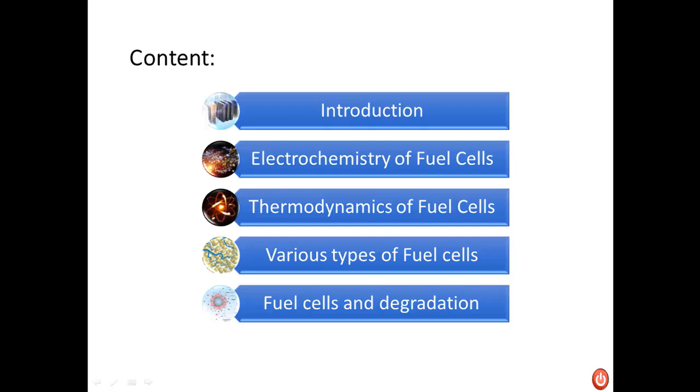The device which does this task is called a fuel cell. The agenda for this presentation will follow some introductory material about the fuel cell, then we'll go through the thermodynamics and electrochemistry of fuel cells and various types of fuel cells. I don't know whether I have sufficient time to cover all of these factors, so I will split this session into 2 or 3 sessions so students can follow. So, introduction to fuel cell - the most important thing is to know what a fuel cell is.

Like an engine, a fuel cell is a device where hydrogen as a fuel enters the device, and oxygen from the other side enters this black box - we could consider it as the fuel cell - and it produces electricity for us, and the byproducts are water vapor and some heat. A fuel cell is a device which converts chemical energy of fuels directly to electricity via several electrochemical reactions. The first fuel cell was built in 1839 by Sir William Robert.

These are two applicable hydrogen fuel cells. One is taken from inside the hydrogen fuel cell car, Toyota Mirai - we will get back to that in the next slides. This other one is another type of hydrogen fuel cell for stationary power generation, that could be used in your house, your home, and residential sectors. This is why we need to look at new fuels and alternative vehicles, most probably for hydrogen. These are the important terms in alternative vehicles, like gasoline powered and hybrid electric vehicles, and they are the most important parts we're going to cover today.

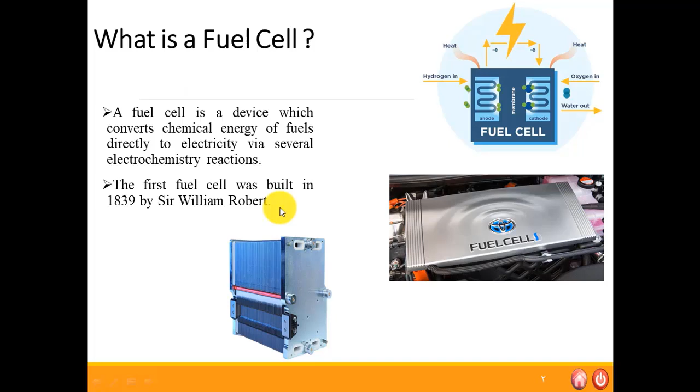Let's move on to the next slide. When we talk about fuel cell, let's see how many patents existed before, and currently they are growing fast and fast. It means that the deployment and consideration of hydrogen fuel cell has substantially improved during the last 1 or 2 decades. If you look at this graph, it nicely represents the improvement in the number of patents in three countries: the United States, the United Kingdom, and Canada. If you consider a time frame from 1975 all the way to 2005, we see that from the late 1990s up to 2005, there is a drastic improvement and drastic growth in patent applications for fuel cell.

This slide shows the number of granted patents, and I just updated this graph to see what happened during 2010 and 2011. You will see the comparison between granted patents in different countries. It shows that in 2010, Japan had around 600 patents regarding fuel cells of different types, but in 2011, they increased to more than 1,000 - let's say more than 40% improvement in patents.

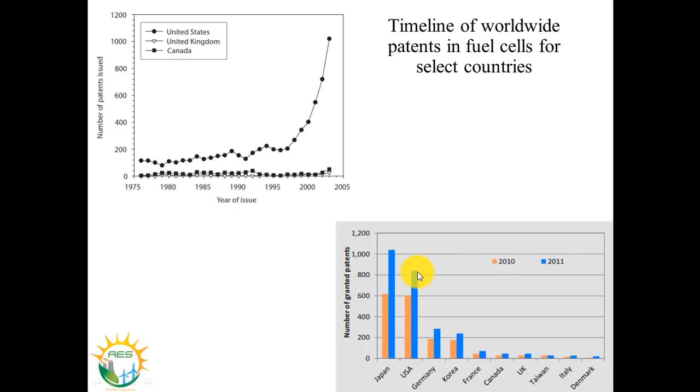Looking at different countries, Japan is the leading country in the improvement and consideration of fuel cell in different primary energy sectors, followed by the United States. In 2010, there were around 600 patents, but in 2011, more than 800 patents, showing the importance of hydrogen fuel cell.

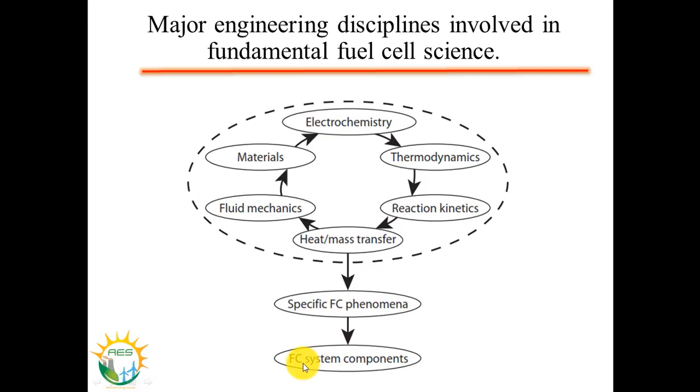Looking at fuel cell, we need to know which engineering disciplines are involved in the fundamental research and patents related to fuel cell. Fuel cell is an electrochemical device, so we need to know electrochemistry, thermodynamics, reaction kinetics, heat and mass transfer, fluid mechanics, and materials. Without materials, you cannot produce electricity. So there are several engineering disciplines here: mechanical, chemical, electrical, and material engineering. Considering all these factors, we have specific fuel cell phenomena, transfer phenomena, and assembling of this fuel cell, either for your car or for powering your home.

Fundamental advantages common to fuel cell systems: a potential for relatively high operating efficiency, scalable to all size power plants. If hydrogen is used as fuel, pollution emissions are strictly a result of the production process of the hydrogen.

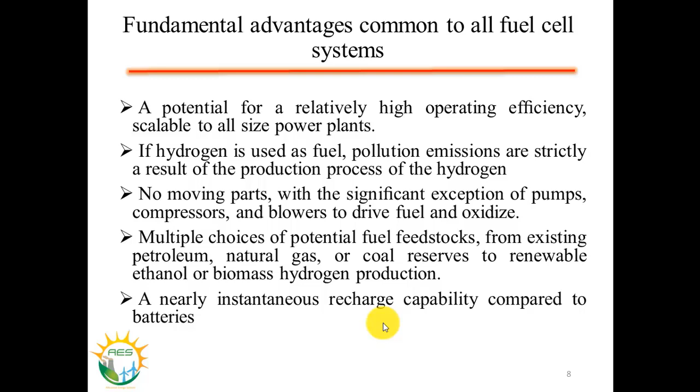These fuel cells do not have moving parts, with the significant exception of pumps, compressors, and blowers to drive fuel and oxidizer. There are multiple choices of potential fuel feedstock from existing petroleum, natural gas, or coal, and even renewable energy sources, with a nearly instantaneous recharge capability compared to battery.

So we will get to that one: what are the main differences between fuel cells and batteries?

We need to consider that the fuel cell is not going to be the panacea for every power generation, meaning we cannot just replace all the power sector we have with fuel cells as they produce electricity. We need to look at different options.

Alternative materials and construction methods must be developed to reduce fuel cell system cost to be competitive with the automotive combustion engine. So the fuel cell is promising, has a lot of technology, and is a good option to be considered for sustainable development.

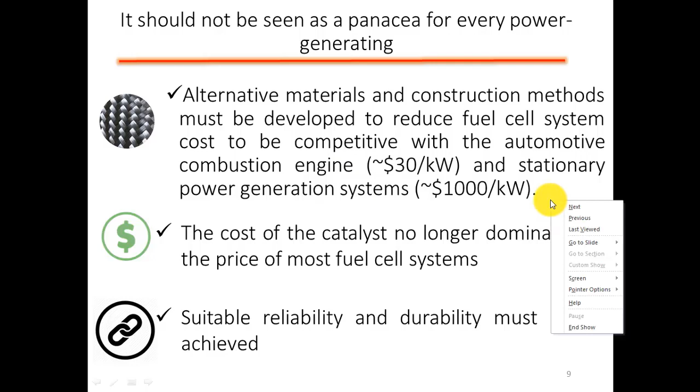Why, if it is good, has fuel cell not been deployed worldwide and globally? Of course, because of the high cost and several barriers we will be facing in the future. One is cost: if it is going to be cost competitive for the transportation sector with the internal combustion engine, the cost should be around $30 per kilowatt for transportation, and for stationary power generation should be around $1,000 per kilowatt.

The cost of the catalyst no longer dominates the price of most fuel cell systems. So why is the fuel cell cost high? Because they use platinum, which is a rare material in the world, and the extraction and use of platinum is an expensive process. This is why fuel cell cost is expensive.

The other concern is suitable reliability and durability. Another drawback of using fuel cells is the degradation mechanism, meaning that since the chemical reaction takes place in the MEA, membrane electrode assembly, these membranes and different compartments of the fuel cell stack will degrade over time, meaning they drop in efficiency.

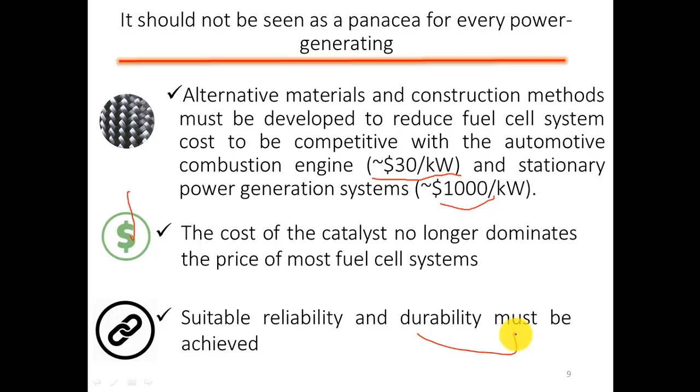The DOE, Department of Energy in the United States, has set a target for small size vehicles: for this hydrogen fuel cell car to be cost competitive with internal combustion engines, they need to withstand up to around 5,000 hours, otherwise these kinds of fuel cells cannot be used.

So what are the drawbacks? The performance of every fuel cell gradually degrades. What are the reasons for degradation in all kinds of fuel cells? Assume you are driving your car: acceleration, deceleration, start, stop, and the environment. We will get back to all these factors, which influence the performance of the fuel cell and eventually result in a decrease in performance.

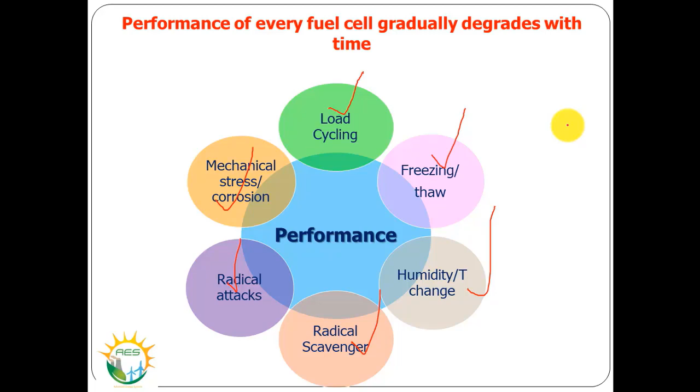So one factor is load cycling, freezing and thaw, humidity changes in the fuel cell, and radical scavengers, because since the reaction is hydrogen plus oxygen, in some cases H2O2 might be produced, and radical attacks to the membrane compartments will occur. This is called a radical scavenger. Radical attacks, mechanical stress, and corrosion are some of the major factors influencing the performance of the fuel cell, which result in it gradually degrading with time.

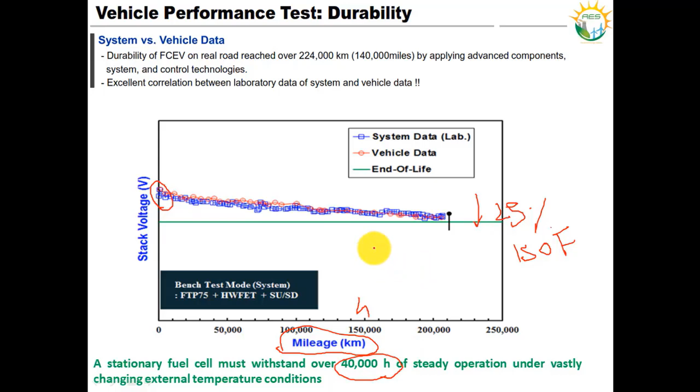So currently, fuel cells for transportation, depending on whether it's light duty or heavy duty, have different protocols. For light duty, as I mentioned, it's 5500 hours, which is equal to around 140,000 miles. A stationary fuel cell must withstand over 40,000 hours because they are just for power generation, like a power plant, which has an age around 20-25 years.

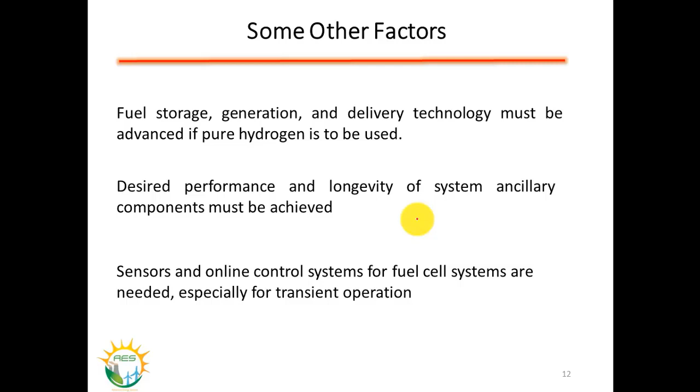So some other factors that we need to consider - what are the other major concerns? Storage, generation, and delivery technology must be advanced if pure hydrogen is to be used. Desired performance and longevity of the system components must be achieved. Another one: sensors and online control monitoring for fuel cell systems are needed, especially for transient operations.

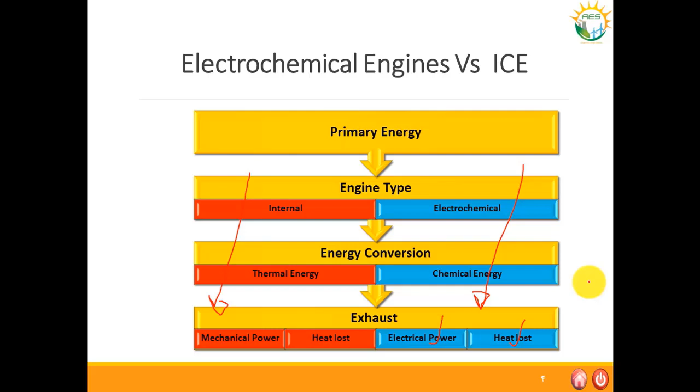So what about the exhaust? The exhaust of our internal combustion engine is mechanical power, shaft work, and heat loss. But on the other side, we have electrical power, directly electricity, not mechanical shaft, and heat loss. The other important thing for fuel cell is the byproduct is water vapor, which is not going to damage the environment. This is why fuel cell is considered one of the environmentally benign power generations, not considering life cycle assessment - I mean in the production phase.

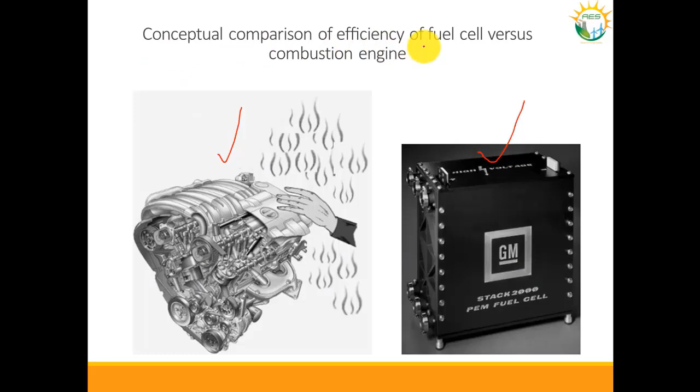So these are the differences between a combustion engine and fuel cell. This is like the engine in your vehicle that you drive every day. And this is from GM, General Motors - a conceptual comparison of efficiency of fuel cell versus combustion engine.

So let's see the differences between a battery and a fuel cell. If you remember our experience with batteries, we've seen a lot of battery types, ranging from your laptop, your cell phone, your clock, your remote control in your home, just to turn on your TV. So you have a common experience of how bad batteries are. But what about fuel cell?

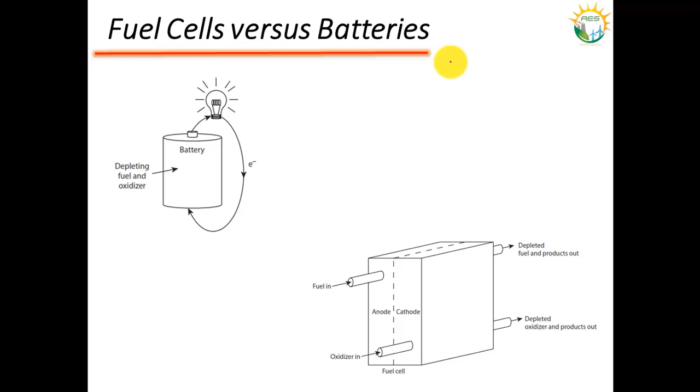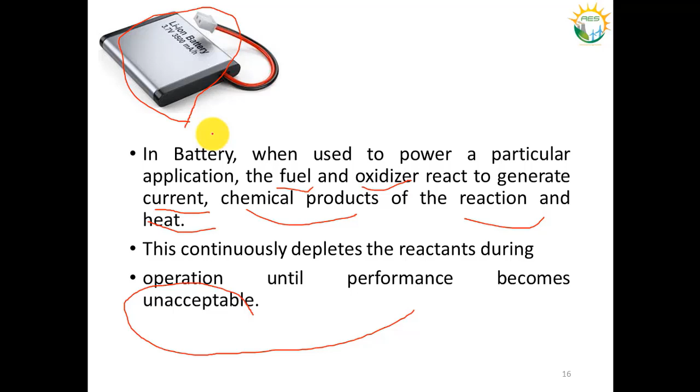So our intention is not just about the battery - this is another specific field, you can go through and read a lot of details about different types of batteries. Here we want to shed light on the importance of fuel cell. Similar to a battery, a fuel cell is like a battery except with constant flow of oxidizer - in this case commonly air - and fuel, which could be hydrogen, methanol, or other fuels, depending on which type of fuel cell you select for your applications.

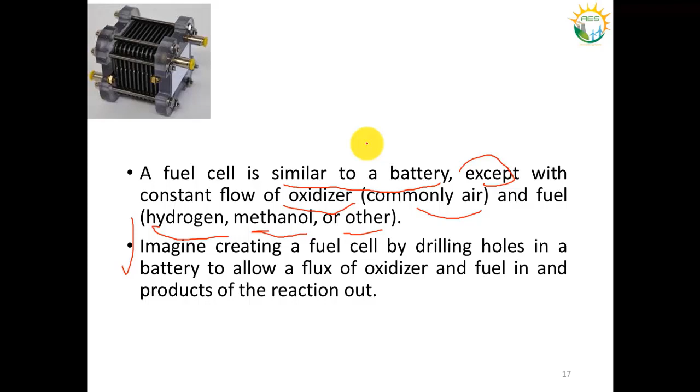So this is the one I mentioned: imagine creating a fuel cell by drilling holes in the battery to allow a flux of oxidizer and fuel in and out. So these are the main differences. Let's see, in thermodynamics we have a system and a control volume. If you want to compare which one is a battery and which one is a fuel cell, look here.

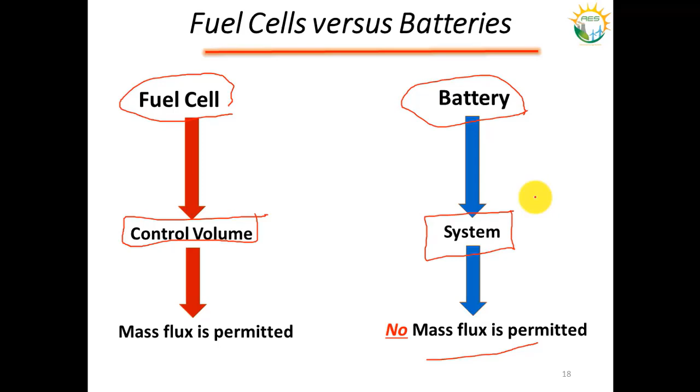We have fuel cell. A fuel cell is like a control volume where mass flux is permitted, while a battery is like a system in thermodynamics where no mass flux is permitted. So fuel cell versus battery: one is a system approach, the other is a control volume approach.

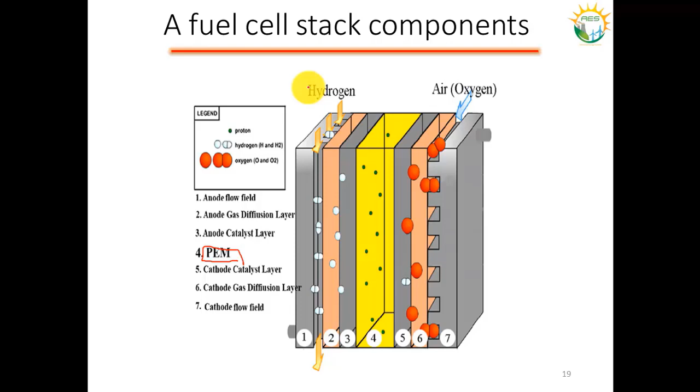Hydrogen comes from the anode, oxygen from air enters the cathode. The electrochemical reaction takes place and electricity is generated, and hot H2O is a byproduct.

So let me just check to see if it works properly. Okay.

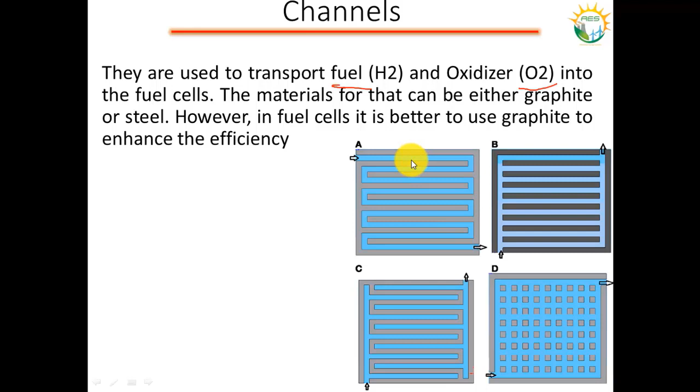Let's go to fuel cell classification. Similar to other fields, we need to divide and classify fuel cells. Fuel cells are generally divided into different categories under two different classifications: one is based on operating temperature, the other is based on electrolyte type.

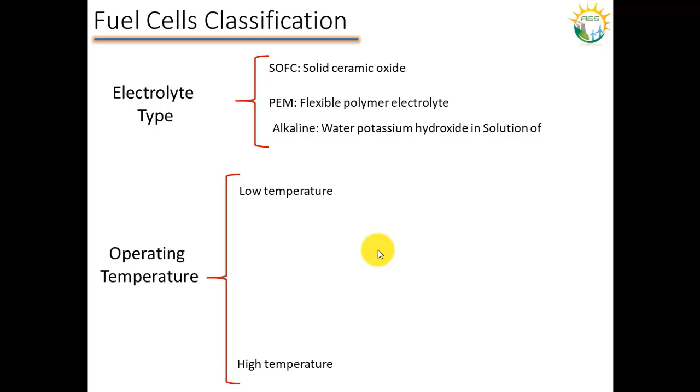Electrolyte type classification includes, for example, SOFC (solid oxide), PEM (flexible polymer electrolyte), and alkaline, which uses potassium hydroxide in solution. What about operating temperature? We have low temperature and high temperature, each with different applicability.

Low temperature fuel cells are like alkaline and PEM fuel cells. They have rapid startup and higher efficiency. This is why in hydrogen fuel cell vehicles we use proton exchange membrane fuel cells. Why? Because when you get into your car, the most important thing is that as soon as you turn it on, it just runs for you. The other factor is higher efficiency, which also affects your decision. This is what we need to consider for this type of fuel cell.

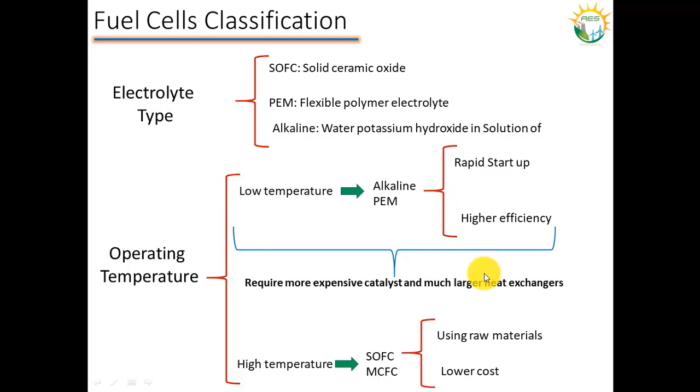When it comes to high temperature, we have solid oxide fuel cells and molten carbonate fuel cells. They use raw materials and their cost is lower compared to other fuel cell types. Low temperature fuel cells require more expensive catalysts and much larger heat exchangers, which is why they are more expensive compared to high temperature fuel cells.